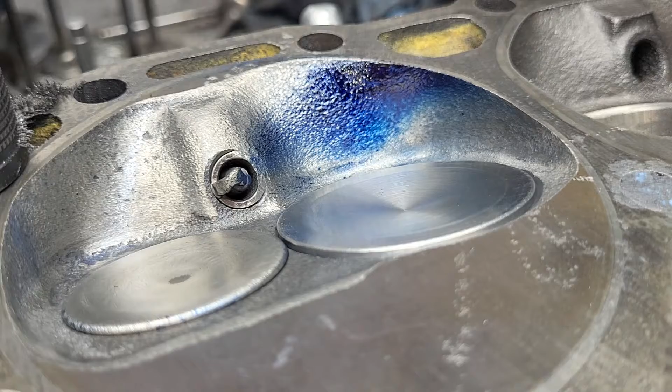All right, guys. 24th cut. Deeper concave on our swirl ramp on the center of the cylinder side, coming in off the short side. I also added a little bit of area to the pinch from the divided wall. Not a lot. Just enough that I thought maybe I could even the speeds up a bit. But it's an interesting test because I think that's the best liquid we've had on the chamber to date.

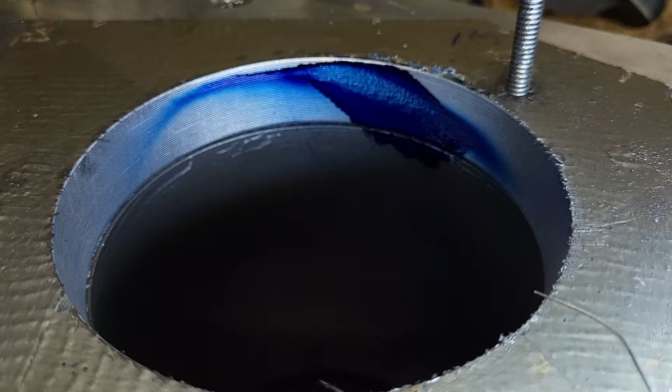Let's take a look at the bore. Give me your opinion, but I think that is pretty damn good. It's nice and wide and it's spread across. Yes, we have some drip action, but that's okay.

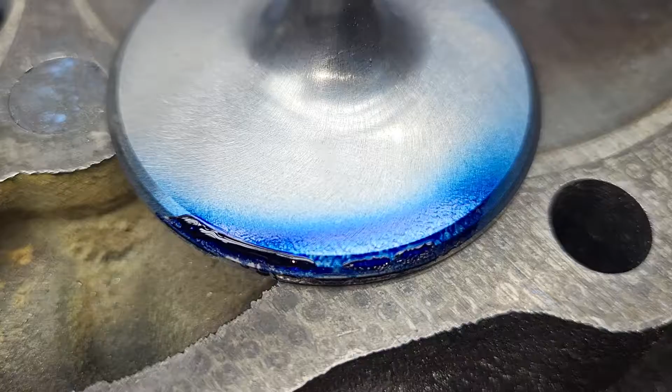Okay, our valve is back to a much wider swath across it than we've been seeing. Interesting stuff, guys. Wow. Okay, that's really wide, and it's coming way up on this side now. Interesting. But it's not as deep into the bowl as it was. Well, that makes sense why it gave us so much of a nicer pattern on the chamber.

Now, if I was just able to move it over a little bit more, that's also interesting. Here, take a look. Look at how much straighter this is now, right? It was more of an angle, and now it's straightened up a little bit. Because I changed this side of the ramp, it's gonna change the way the air exits on this half of the bowl here. Let me turn this around.

Let's just take a quick look down its throat, and then we'll change it around and give a different view. Wow. Definitely nice and wide in that bowl. You can see how it's heading way across, over all the way to the plug. I really like it, guys. Let me know if I'm wrong.

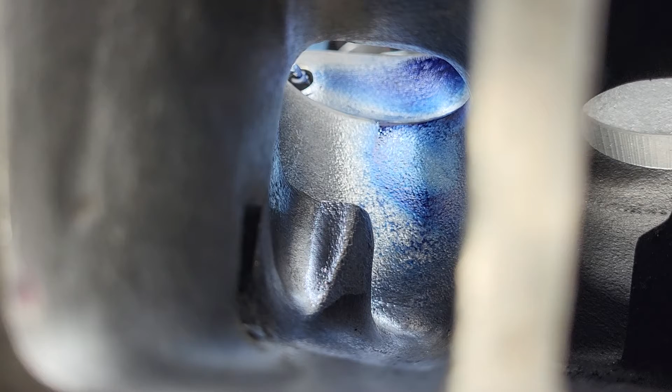You know what else I had to do? I had to take some area out of that left wall that we're looking at right now. And I did some speed measurements. That wall is stupid fast, which means it wants me to do some more work to it, which will change things. And even though I really kind of like where we are right now, I think I may even put a little star on the top of that page. That way we can always look the video up and see how we did.

It did fatten up the curve nicely, but it didn't peak out quite as much. See, Stevie don't like that. He wants it to peak out better. Meanwhile, I want it nice and fat. I have good reason for that.

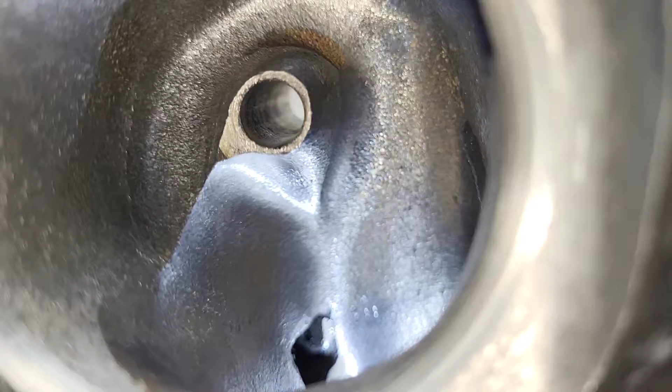Okay, I actually remembered to put the clay in place. We have other clay over here. You can see I actually forgot to clean it. It's full of metal filings, which I'm sure didn't help. And you can see where I whacked it with the Pitot a couple times. In any case, it's not perfect in every way like wifey, but it's going to have to be the way it is. Tough to get in there and get some decent lighting. Let me change it around a little bit.

Okay, trying to show you how I've changed it. I'll one-hand this for you. Took quite a bit of metal out of this area here. Okay, so it's exiting. This actually exits on this kind of an angle here, because it's coming around and this is curved. This is all concave curve.

Must be wifey, hold on.

Okay, trying to give you guys a view. Now, I did a couple things different, and, you know, it's like 24 cuts in and on and off the bench a million times, and I'm going to have to do more than one little thing at a time. But when I did some string action, I noticed how the air was fighting. It would sit on this side, and then it would jump to this side, and it would go on this side, because I had a relatively sharp edge here.

So I decided to smooth that edge out a little bit more, which I figured by doing so will send more around this part of the helix and probably knock our swirl up a touch. And our swirl did go up a little bit, well, actually it should, because this is coming up at a different angle. It's not going directly against our high helix flow as much.

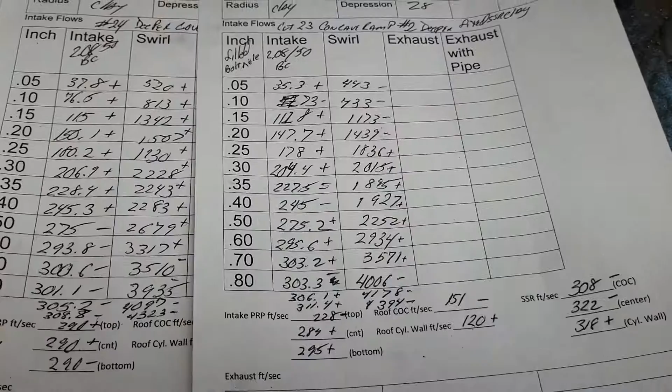Okay, let's do our hit or miss flows and speeds. 23rd cut, 24th cut. Deeper concave ramp, add small area to pinch.

Okay, how'd we do? Well, plus, fattening my curve up to 500.

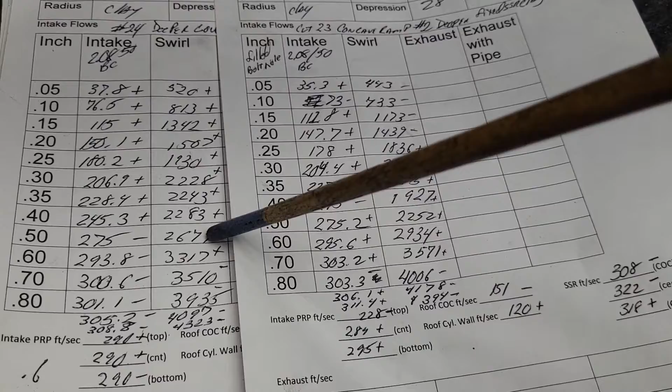Remember guys, why is this part of the curve important? We see these numbers twice. Meanwhile, we only see these numbers once. Keep that in mind, okay?

Even if Stevie goes off the reservation and puts a 700 lift cam in there, this would be a winner, wouldn't it? Sorry, I'm looking at the wrong one. Dummy. Okay, even if we went 600 lift, we only got two minuses, and we're still pretty good. It went from 295.6 to 293.8.

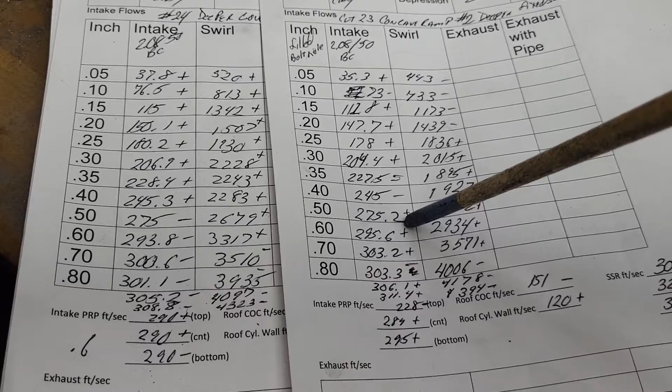By the way, this port was quieter than this port. I really should make a note on the pages how noisy they are, because that really is important. This one you could hear the two paths of the air colliding and fighting each other. This one was quieter. Notice we got a couple CFM right at 300.

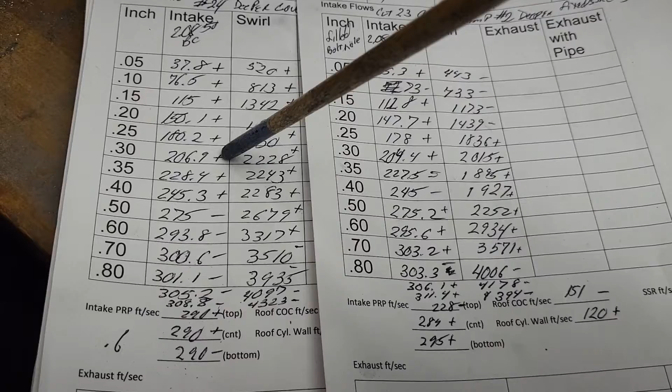Okay, 206.9, not a bad number, even though it is a big port. I promise I will see these, but not until I'm done fiddling with them some more.

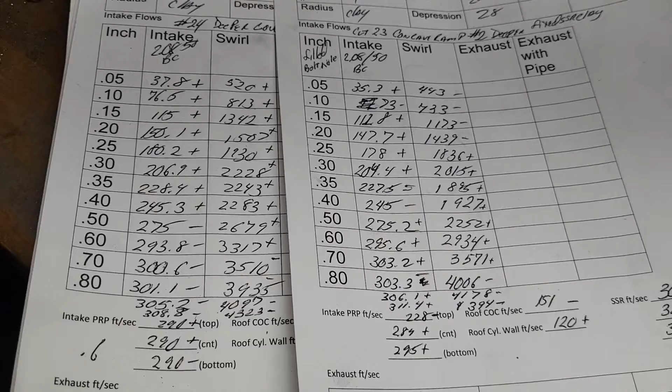How'd we top out? Well, we went 311.4, which I think was our best number to date. With this, we did go down a touch to 308.8. But that's at an inch. So at .800, we got 301.1, 303.3, down a touch.

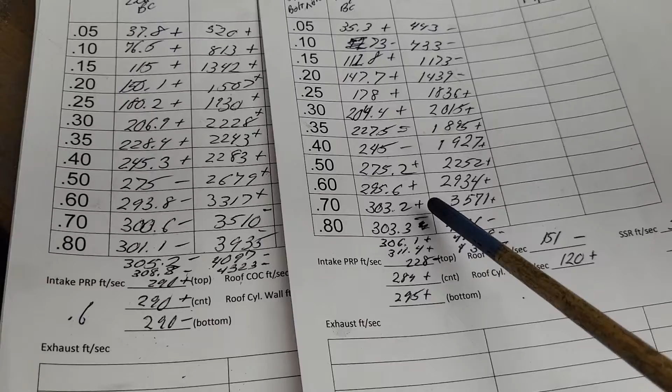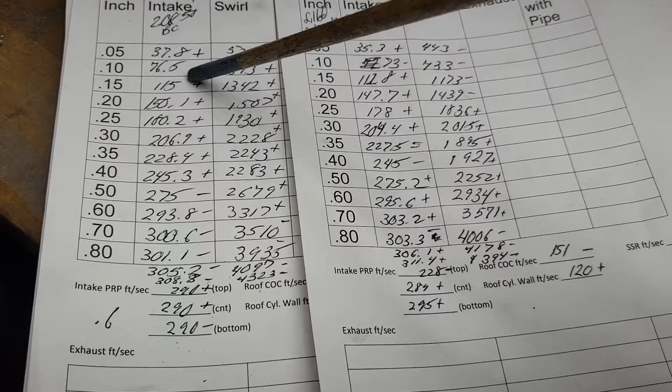Okay, let's take a look at our swirls, because our swirls are really starting to pique my interest. All the plus flows, all plus swirls, even got a couple plus swirls on our minuses, and then we lose. More flow here, more swirl. More flow here, more swirl.

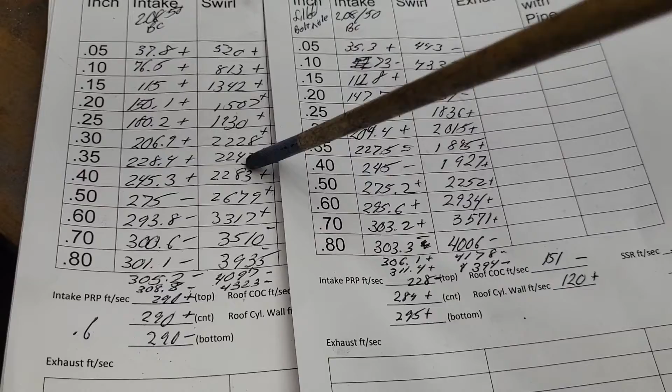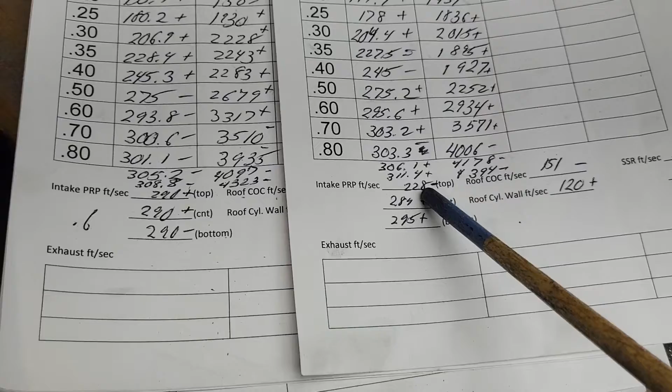Interesting, right? So I added some area to our pinch. And what did it do? Well, this one had a dead spot in the roof, which I wasn't happy about. Now they're nice and even. I cranked it up to more lift than that, and they were dead even and well over 300. So in reality, it could still use more area at the pinch.

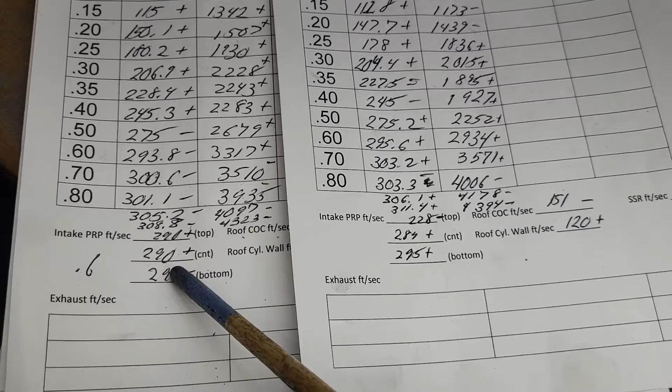Now remember, this is cut for a 1206 gasket, so may have to look at that some more. Let's move this stuff around so you can see the other speeds.

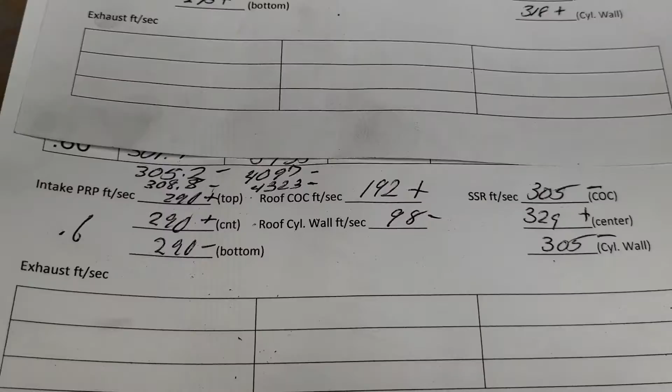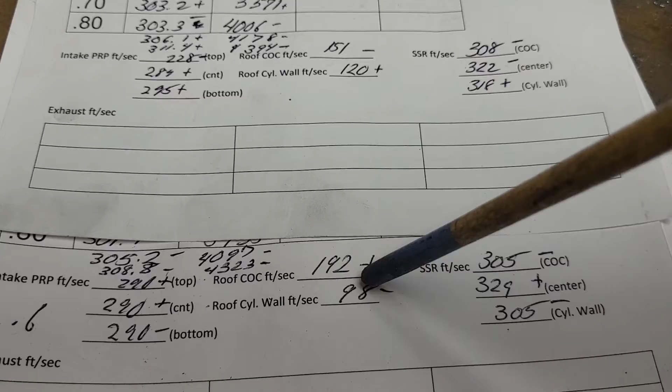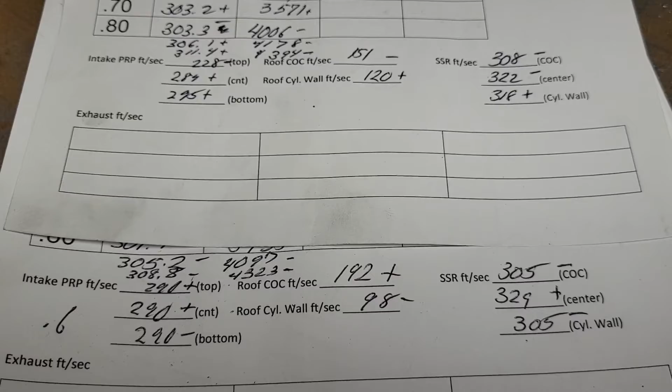Okay, all these air speeds are taken at 600 lift. So at 600 lift, we're actually flowing up like 2 CFM less. We went from 151 to 192. That cranked up a lot, but I think that was due to me getting rid of that sharp edge around the guide, making it a little bit easier for it to go around. But it did drop the cylinder wall of the roof down in speed.

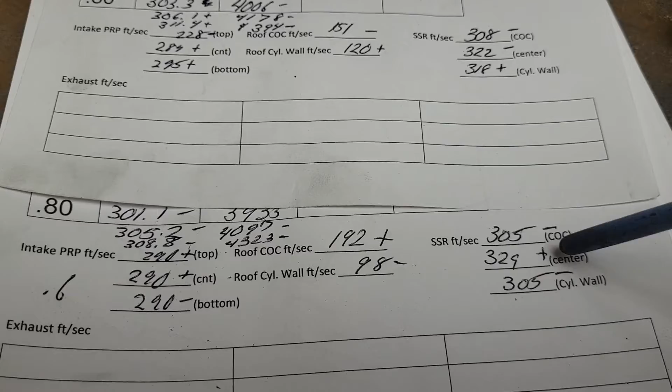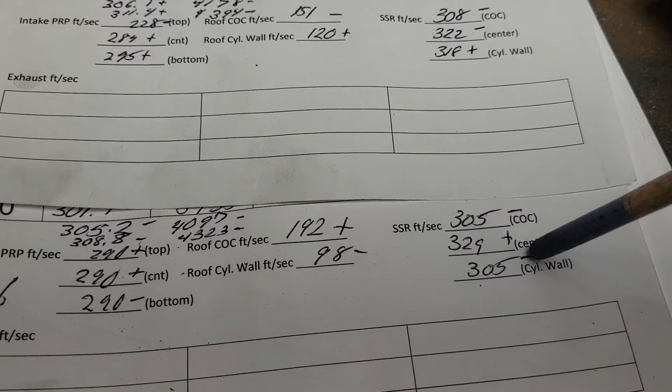Okay, neither here nor there. Let's take a look at our short side. 308 to 305, that's a minus. 322 to 329, that's a plus. 318 to 305, minus. Dead even across it. Tough to beat, even though it's got clay and all kinds of mess on it. That's kind of happening.

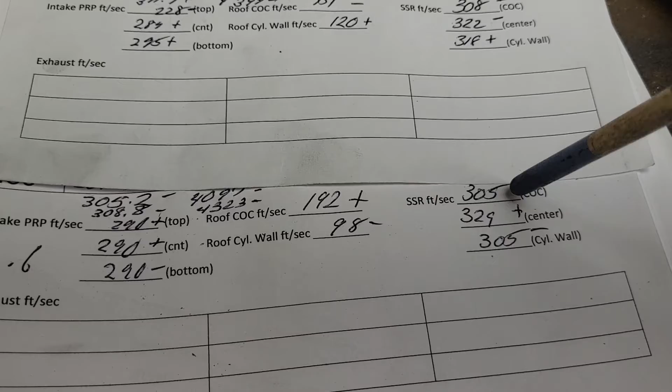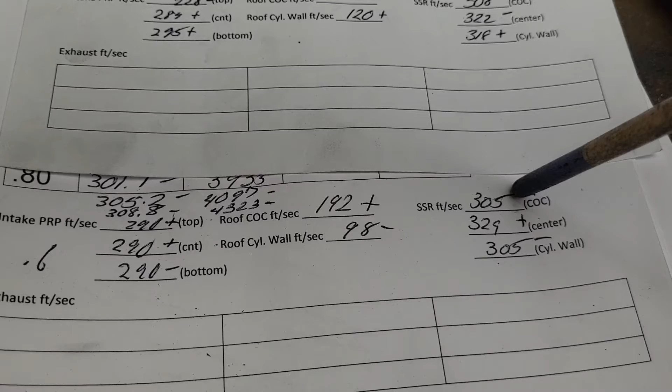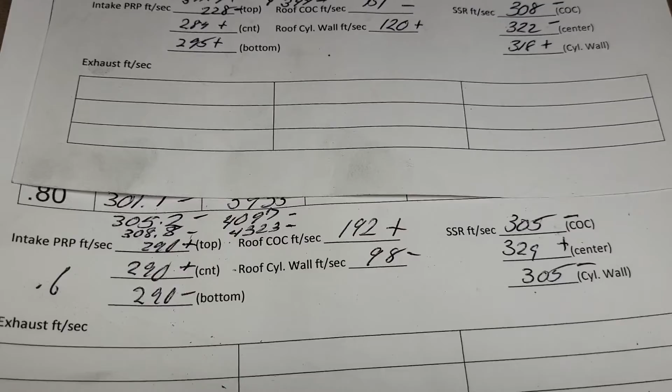Now, the center of the cylinder has that really fast wall. If I make that work better, that will increase the speed most likely. This may be the flow that's the tipping point, and everything I do after that will go downhill. We'll find out, because I've got to do it that way as far as I'm concerned.

You know, what did somebody write in the comments? How do you know you've gone too far until you've gone too far? I like it, it makes sense to me. I'm pretty good at going too far.

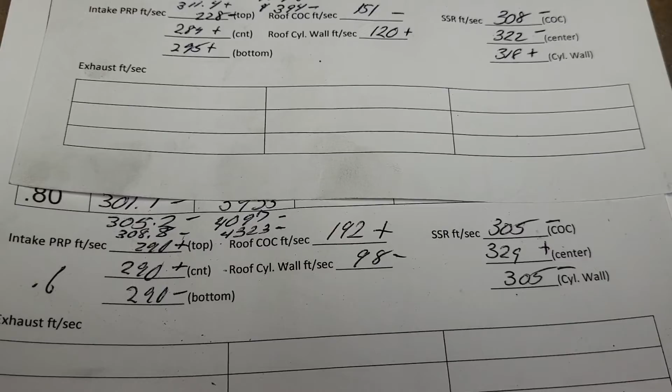I mean, who else is stupid enough to fill two flow cards on one port? One port, literally. Yeah, stupid amount of time. And if I was just making $150 an hour for R&D, that would probably be worth it, wouldn't it? I know it would make wifey happy.